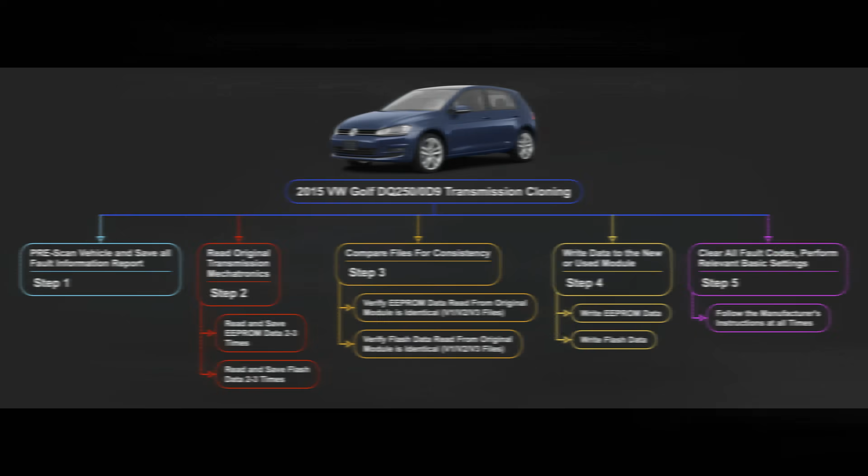Today's vehicle is a 2015 Volkswagen Golf with a 6-speed automatic dual clutch DSG transmission. On these transmissions, all of the dual clutch variants found in Volkswagen, Audi, and Porsche, which is referred to as the PDK, have an immobilizer related component built into the Mechatronics, which serves as the transmission control unit.

Therefore, if you are going to install a used unit or a new unit, the immobilizer portion has to be mated to the vehicle. If you're going to use a used unit, this has to be done with cloning or with the factory software, which is ODIS. Many folks don't have access to ODIS, so cloning is going to be the preferred path.

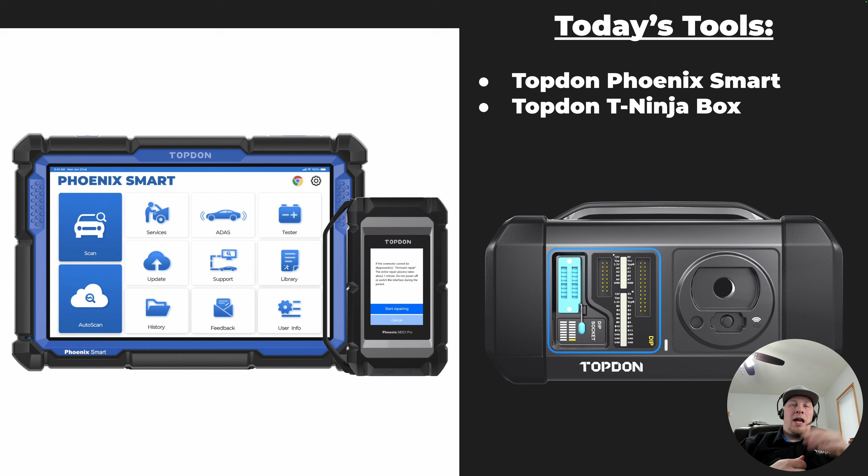The tools we're going to use today are the Topdon Phoenix Smart and the Topdon T-Ninja box. You can use any of the professional series Topdon scan tools, which would include the Phoenix Max, the Phoenix Smart, and the Phoenix Elite. All of those will work, as well as the Phoenix Plus. The key is we need to be able to use a USB cable from the dongle or VCI to the scan tool, and then the Y cable from the T-Ninja box to the vehicle and/or the VCI.

The first thing we always have to do when doing any kind of cloning is verify the application. We don't know what we're going to select in the software on the scan tool if we're not aware of what the specific transmission model is.

So we're going to use PartsLink 24, which is a very easy to use website in order to determine what the transmission in this specific vehicle is. PartsLink is available both as a monthly subscription and a one-time subscription for short-term use. Basically we go into PartsLink 24 and type in the VIN.

It's going to give us this box on the far left that says the transmission code. That code is specifically for the Mechatronics, essentially like a variant of the transmission. We want to make sure this matches up with the original if we're using a used transmission. It tells us how many speeds, which is a 6-speed automatic, and then it tells us that it is a DQ250.

DQ250 is often the designation you will see show up in the scan tool software on the Topdon Professional Series tools. We also need to know the Volkswagen nomenclature for this particular transmission. So we go to the transmission assembly section on PartsLink, and the assembly part number's first 3 characters is the designation of the transmission. This is an 0D9 transmission, which is a 6-speed dual clutch transmission, and you'll notice that shows us the first 3 characters of that assembly part number is 0D9. So we know that's the variant we're dealing with.

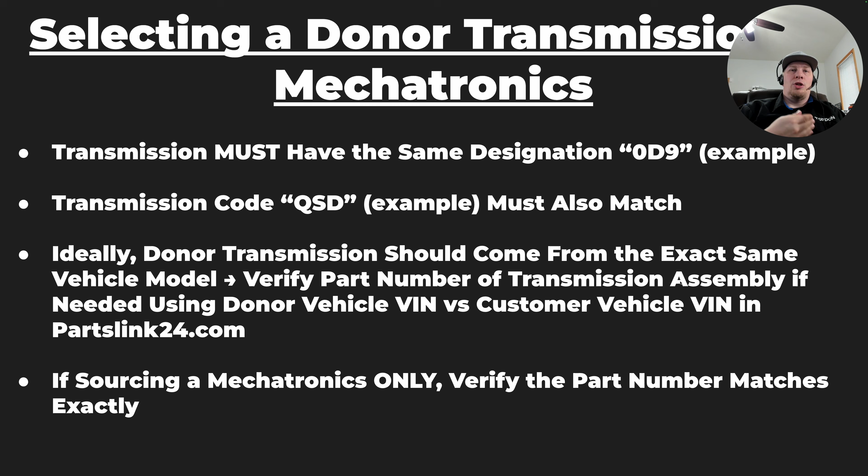This is one thing we want to keep in mind when dealing with this cloning process. It's really important to understand that if we're installing a used unit with over 100,000 miles, after we do the cloning and the adaptations or basic settings on the transmission, it's possible that due to clutch wear, the transmission may not be able to readapt the clutch pressures correctly, which could cause a no movement condition. We should always warn the customer about this possibility before allowing a used component to be installed. Is it a super high probability? Most likely not. Is it still possible? Yes.

Clutches need to be replaced if you encounter a no move condition, unless you have something like a shift fork related error code, in which case you may need to replace the entire transmission. So again, we want to make sure we're communicating this accurately to the customer before we suggest any used components on this vehicle.

So just a couple of notes on cloning. We want to keep in mind that when doing a used or new transmission, it's much easier to do the cloning if we have both transmissions out of the vehicle, on the bench. Why? It's easier to access the connectors and pin them out with the T-Ninja box if they are both out of the vehicle. Does that make it impossible to do it when they're in the vehicle? No, but it's significantly easier to access all the pins on certain applications if they are removed from the vehicle.

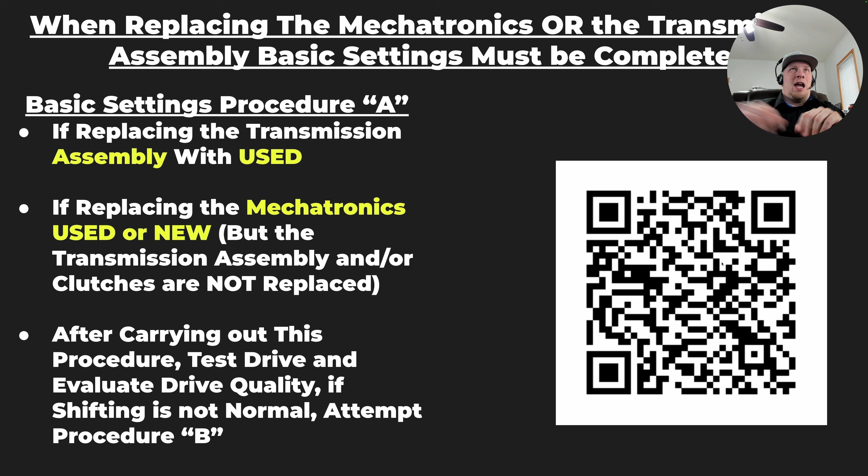If the clutches are not being serviced, we want to try procedure A and see if we can get good shift quality and drivability with only procedure A. If procedure A does not get the job done, or we are replacing the entire transmission as brand new, or the clutch packs have been replaced, then we want to try procedure B.

If procedure A fails and you have poor shift quality or incorrect engagement, then we need to try procedure B. Now, when we try procedure B, the customer needs to be informed that there is always a limited possibility the transmission may exhibit a no-movement condition if the clutches were not replaced, or if the transmission was not replaced as a brand new assembly.

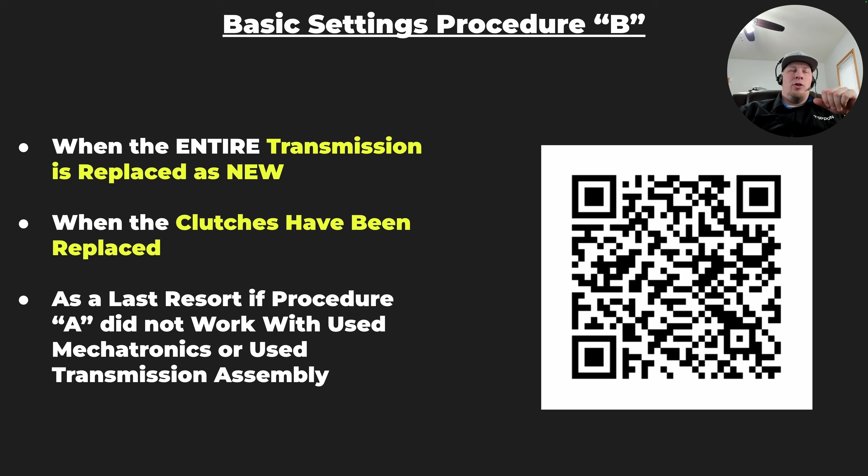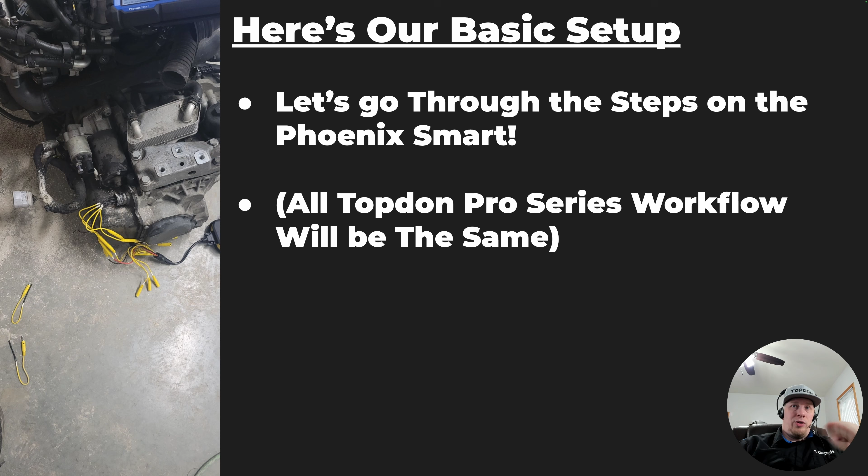Okay, so we've covered all the foundational knowledge, and at this point we're going to show you the walkthrough on the scan tool portion. Our basic setup uses the T-Ninja box and pinning out the transmission, as you can see in the picture on the left. We're going to switch over to the scan tool screen now, and I'll walk you through the process steps.

As promised, we are now going to walk through the scan tool portion of the cloning process. We're going to use the Phoenix Smart on this one. However, this works the same on the Phoenix Max, Phoenix Elite, Phoenix Smart, Phoenix Pro, and Phoenix Plus, as well as the Phoenix Remote. We do have to have the T-Ninja box in order to complete this operation.

So we're going to go into the scan menu and build the vehicle under the Volkswagen brand. We have to go into the Volkswagen-specific software when doing cloning of this nature, not through the IMMO Prog menu. That is unique to Volkswagen Audi.

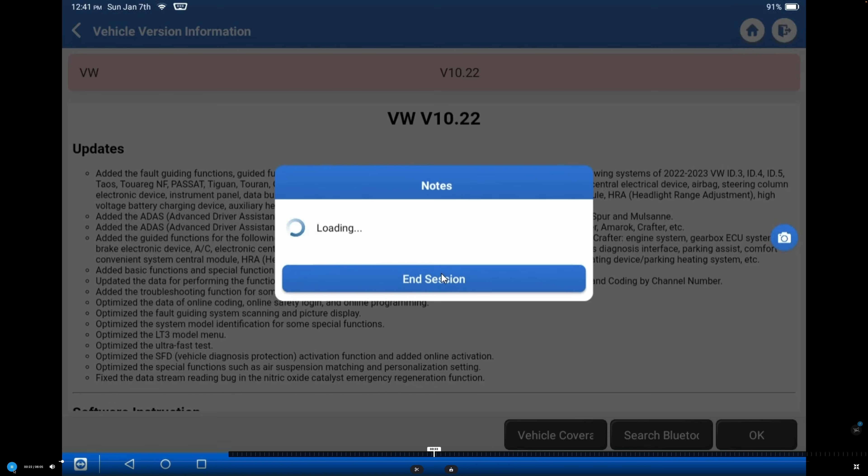Now you saw it told us it had an IP address for the dongle. That's a direct result of having the USB cable plugged in. You'll see that message when it's USB connected. You can also look at the screen on your dongle to verify you're connected via USB and not via Bluetooth. Okay, so now we're in the main menu here.

We're going to go to the special functions section up here in the banner, and that's where we're going to find our immobilizer-related functions for cloning.

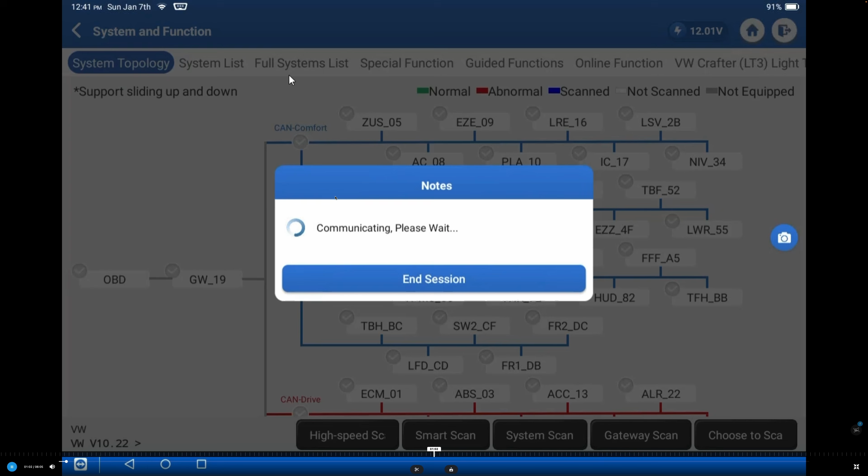It's important to keep in mind you do have to have a good network connection during this process as well. Make sure you have a good internet connection when attempting to do the cloning.

So we're going to scroll down and find anti-theft function, hit OK. Generation 4 and above immobilizer, gearbox module replacement, and platform mode is what we are going to select. And we have to have our Y cable connected.

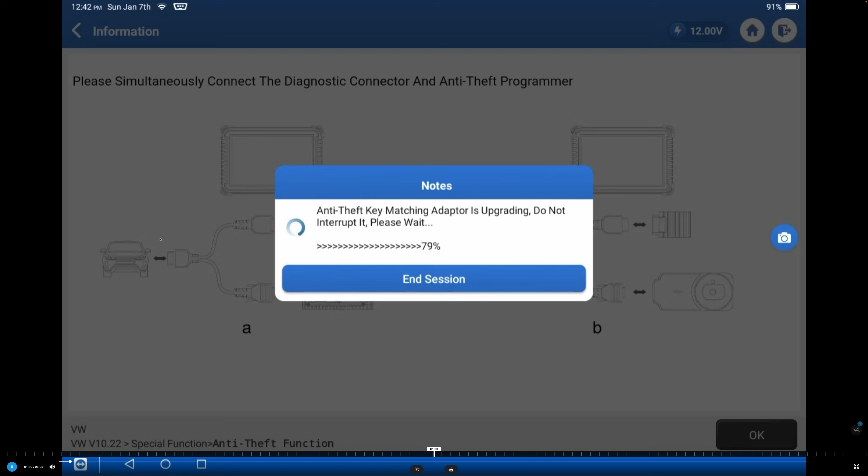You may notice the T-Ninja box may upgrade the firmware when you go to connect. That's normal - it's often getting updates to improve or expand functionality. You'll always want to let it go ahead and do this, and it doesn't take very long. Okay, so we have performed the update.

Now we're going to proceed into the software. Here's the screen where we are going to select the appropriate transmission. Remember when we were in PartsLink24, we saw the designation DQ250, and there's a suffix number because there's more than one DQ250 variant. You'll also notice some of these provide the three-digit identifier like 0AM as a clarifying characteristic, which is why we may also need to know that in the software. Again, PartsLink24 will give us this information.

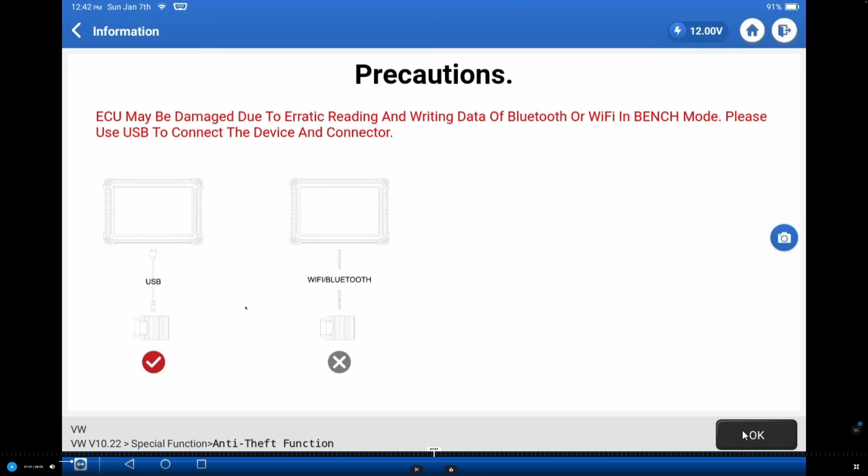Okay, so now we've got our dongle hardline connected with the USB cable. We're going to click on the wiring diagram so we can see what connections we need to make with the T-Ninja box. It's going to download the wiring diagram from the internet.

This is going to ask us if we're using an adapter cable or not - we're going to select no. The adapter cable is a specialized plug-and-play adapter that makes it so you don't have to make the pin connections individually, so we're going to say not used. It's going to download our diagram, and now it's just going to give us the pin connector at the Mechatronics unit on the transmission housing. We just need to match the numbers in the picture with the numbered cables on the T-Ninja box - pretty straightforward and simple to do.

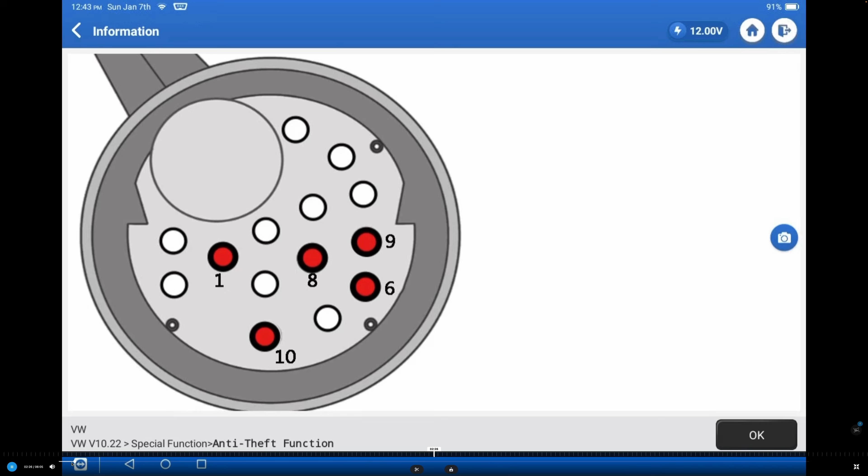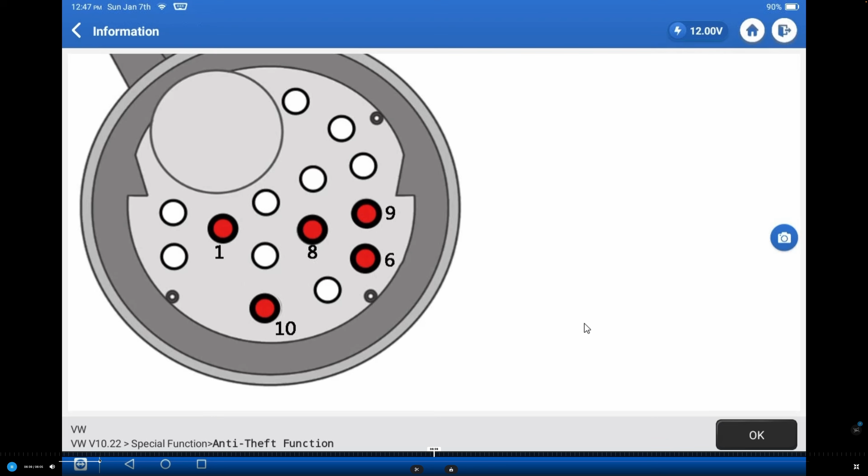We'll speed through this a little bit here. Left the screen up for a little bit so that the connections could be made. Okay, so we're going to go back, and now we are going to connect to the module. That's going to be the next step in the process here.

Sometimes this will take a moment to complete the function. Okay, so we are connected to the module, and you will see a chip ID provided by the scan tool when it has made a successful connection with the module. If it fails, try multiple times, and typically you will be able to connect. But once you have your chip ID read out, now we can back up the EEPROM data and the flash data from this specific module.

So we're going to go ahead and speed through here. Whoops, I sped through a little bit. Okay. So now we're going to back up the EEPROM data, and that goes pretty fast as there's not a whole lot of information there that's super large in size. And then we're going to save our file.

And I always like to name the files version 1, version 2, version 3, because again, we're going to read the file multiple times, and we're going to save it as version 1, 2, and 3. That way we can compare the files to make sure that they were read successfully and did not get corrupted.

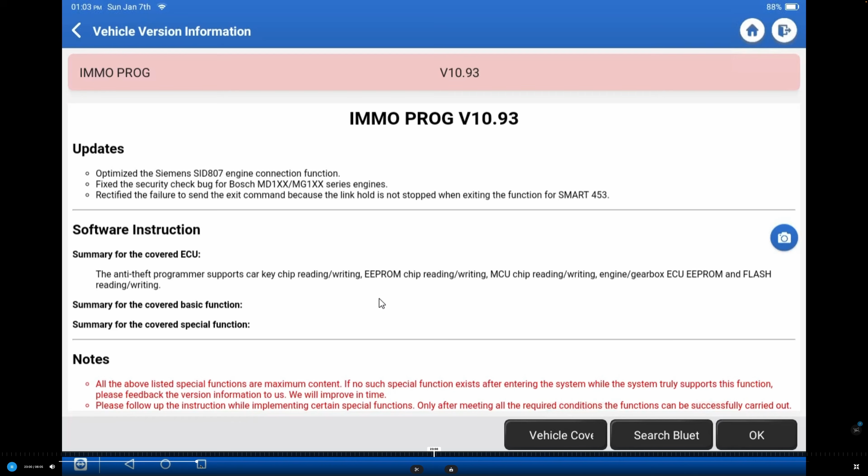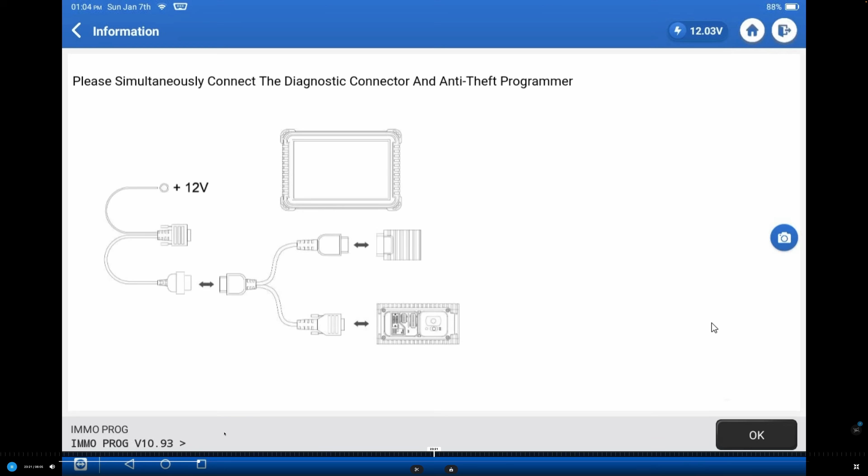So after we hit OK, we're going to hit data comparison. Now we simply load the 2 versions of the data, original V1 of the flash, original V2 of the flash, in each of the subsequent slots there. And now we're going to do a data comparison. Boom, they are identical. That means we should have read quality, accurate data, not corrupted data.

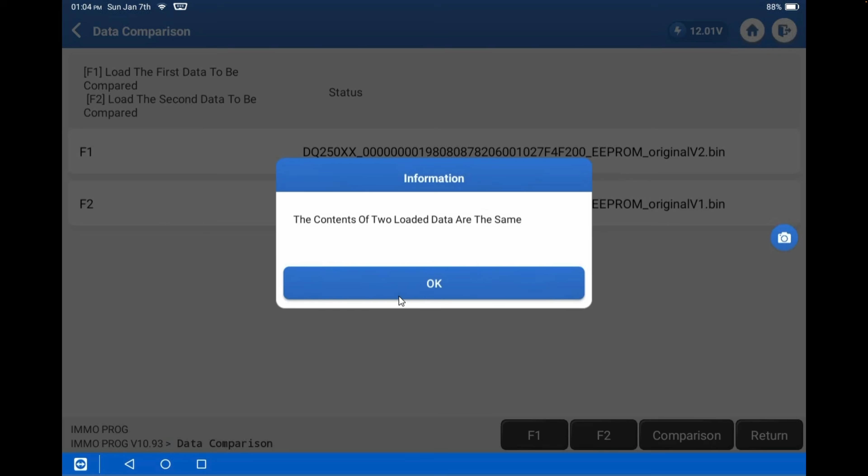Now we're doing the same with the EEPROM files, and it's going to make a quick comparison. Okay, so we read good data on both, presumably here. If you really want to go a little bit further, you could do 3 copies and compare all 3, just to be extra sure that there's no corruption. But the odds of 3 corrupted reads is extremely low, so long as you are using your USB.

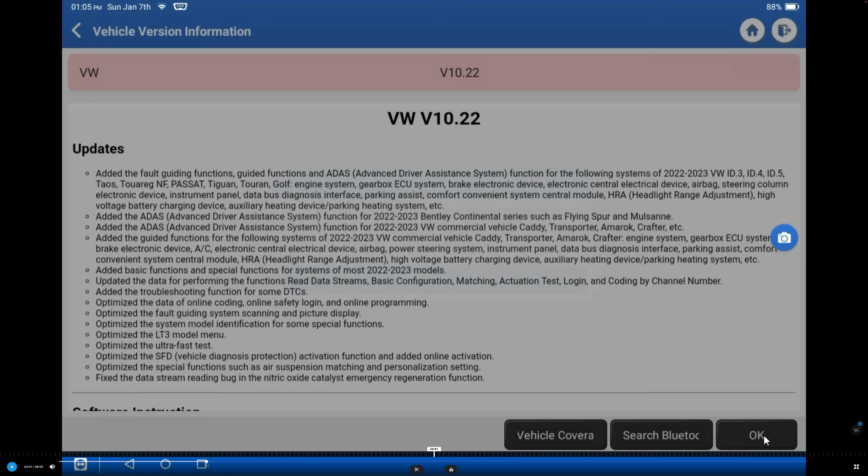Now that we know the files are good and not corrupted, we'll go back into the Volkswagen software. Again, we saw that it assigned an IP address because we're connected via USB. Now we're going to connect to the used module that we are installing in this vehicle, and we're going to write the data that we pulled from the original module into the used donor module.

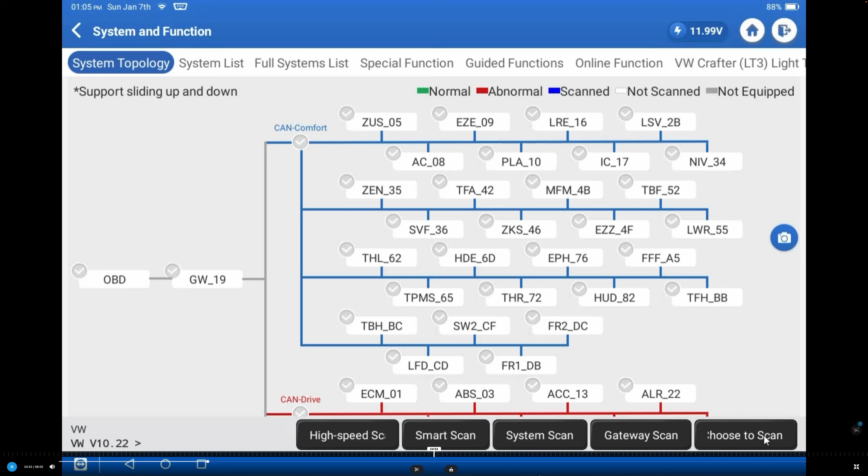So we'll go into the special functions menu just like we did before, and anti-theft function is what we're selecting. We're going to connect just like we did before. DQ250 is what we'll select just like before. OK.

And then we're going to go ahead and hit the wiring diagram again so we make sure we make our connections without the adapter cable. We're going to make sure we get our connections correct again here and connect to the donor module.

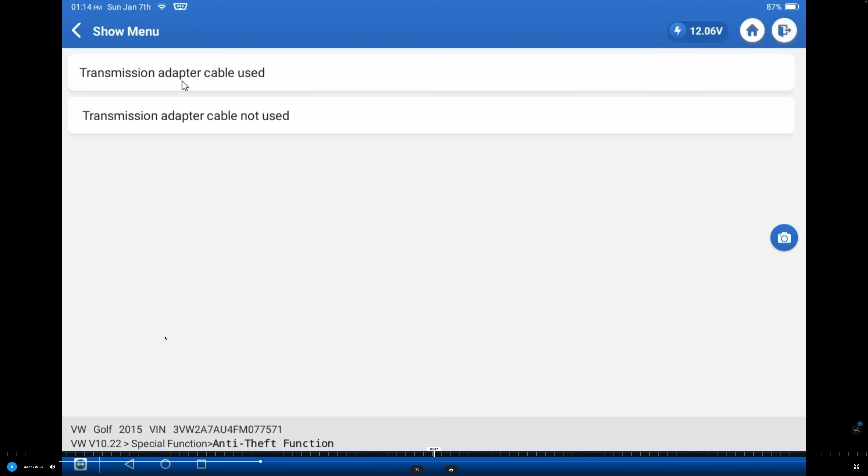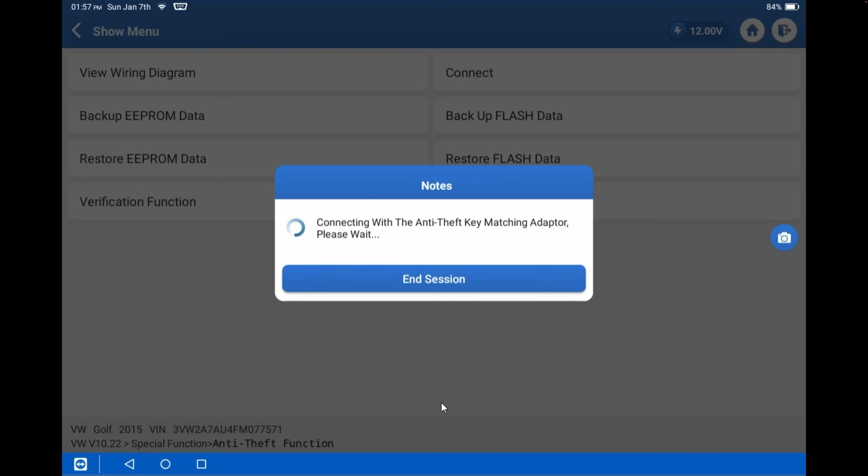And it's the same wiring diagram, of course. So now we're going to go ahead and connect to the module. Just like before, we should expect to see a chip ID here if we've got a successful connection. Remember, we're connected to the donor used module currently, and we also need to make sure we have a strong internet connection.

We did read the chip ID, which means we have a good connection. Now we are going to restore the EEPROM data. We're in the menu here to do the restoration. We want to make sure we select the EEPROM data for the original module. It doesn't matter if we select version 1 or 2 since both were the same. We'll hit OK, and it's going to restore the file to the used donor module. This generally doesn't take too long because the EEPROM data is pretty small.

Now we're going to restore the flash data, and we'll select our flash file and hit OK. This will take a little bit longer since the flash file is quite a bit larger in overall data than the EEPROM file. We'll fast forward this, but be very patient because this can take a while. You can see it went a little bit faster than I expected there.

So now that we've successfully completed the restoration of the EEPROM and flash data to the donor module, if it is not installed in the vehicle, we could install it now. If it's already installed, we can connect everything back up and turn the key back on for the vehicle. We would need to post-scan the vehicle, clear all the fault codes after we save that post-scan, and then there may be some basic settings that would need to be performed on various modules as a result of the battery being disconnected when the transmission was out, and/or the replacement of the transmission mechatronics and/or transmission assembly and/or clutch packs.